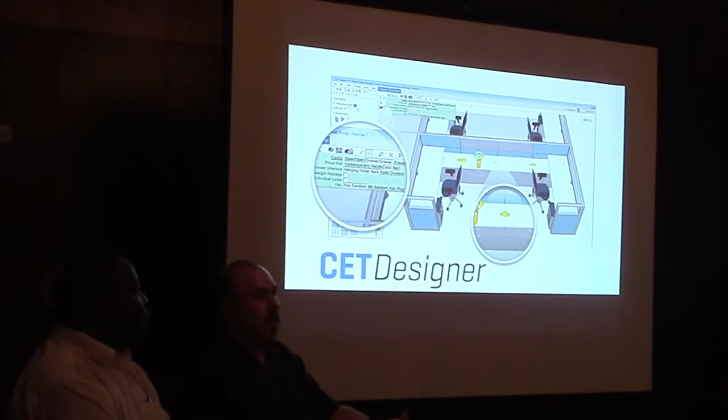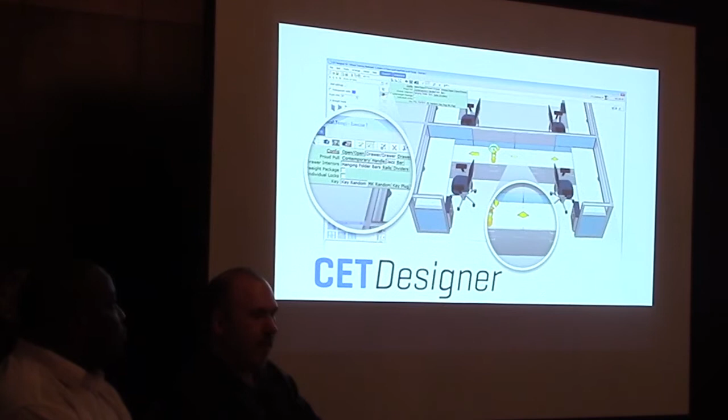We don't actually deal with Revit. What we use is a piece of technology from a company called CET Designer, made by a company called Configura. I call it pseudo-BIM, quasi-BIM. It operates on a principle called parametric graphic calculation and configuration. So essentially the software recognizes the interrelation, the correlation between specific parts and pieces you're putting together.

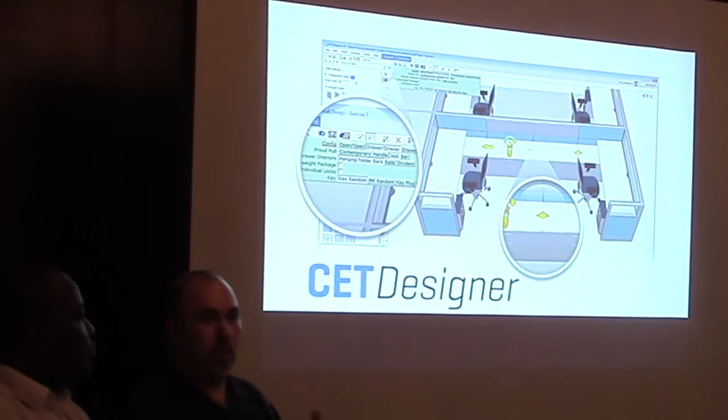And it completes that junction for you. So if you put, say for instance, electrical into a panel, it's going to immediately know to put the proper connectors in. It's going to be 3+1 power, or 3+2, or 2+2, or whatever, and it's going to fill in those parameters for you.

So what this has enabled us to do is design entire floor plans in record time. The turnover market is incredibly fast. We do real-time 2D design, real-time 3D design. It's building those 3D models as you're building the 2D plan.

From a facilities point of view, the really interesting thing is, as it's doing this, it's also building the full specifications. So when we're designing a floor plan for, say, a large municipal client, we're actually building all the specs and doing all that specification within the program itself.

Back in what I call the dark ages, which was about 5 years ago, when we were just using CAD. CAD, of course, from a furniture manufacturer's perspective, is a very static object, a very static environment. You're dealing specifically in rectangular or round shapes. There's not a lot of inherent intelligence within those objects from the furniture manufacturers.

This was the game changer within our industry now. Most of the major manufacturers in North America have moved to this modeling. So Steelcase is on it, Teknion's on it, Haworth is on it. Other manufacturers are on something comparable through ICE, which is an offshoot of the DIRTT Corporation.

So for our perspective, as we're building these models and these floor plans, we're building the specification. What it allows us to do is when we get into a situation where, let's face it, we're kind of like the last kid on the playground when it comes to a building. Everything's done before we walk in, and then everybody goes, oh right, we need furniture, okay let's get that in.

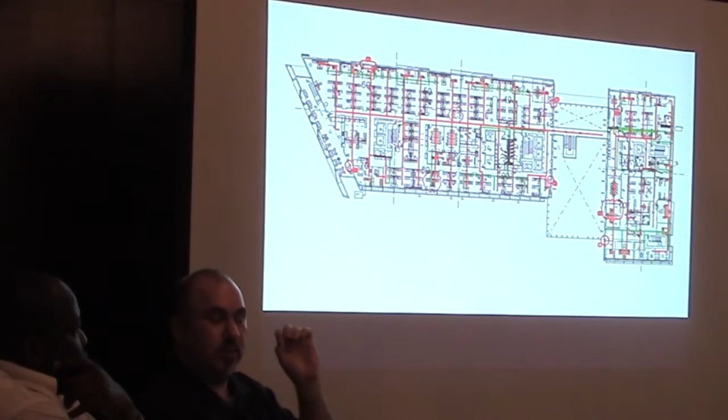So there's really kind of a multi-tiered aspect. This is why I kind of call it BIM light or quasi-BIM, because it does have inherent intelligence in the objects that allows us to extrapolate and do a lot more now than we could 5 years ago when we were just dealing with static CAD objects.

The problem is, actually, can you go back one? Yes. We have the technology. So, oh, perfect, all right.

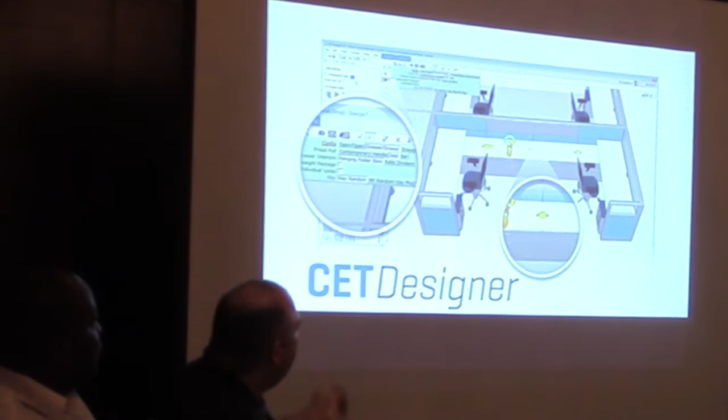So this is kind of a standard 3D with the parametrics in the corner that allow us to specify as we're doing design on the fly in front of the client. The next slide shows you the overall floor plan in a 2D, 3D modeling environment. But the third one, this is where things really get interesting.

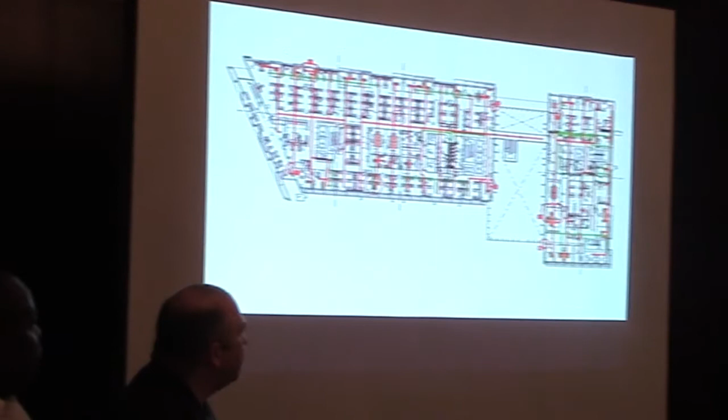This was a recent municipal project that I was involved with, and this is not typically how our floor plan turns out. Our floor plan is usually nice and very clean. It's got all the tag and all the furniture and everything up.

What we're finding now is furniture is no longer just call your local manufacturer, say I need some panels or work surfaces, it shows up 6 weeks later, you snap it in, and it's done. Now our systems are starting to get incorporated earlier into building systems. We're being influenced by raised floor, electrical box placements, things that if not done right up front will wind up being a massive amount of change orders later, a big schmozzle on site, leading to delays.

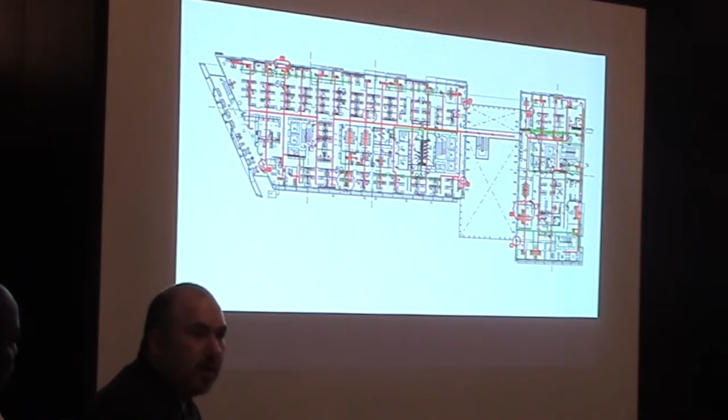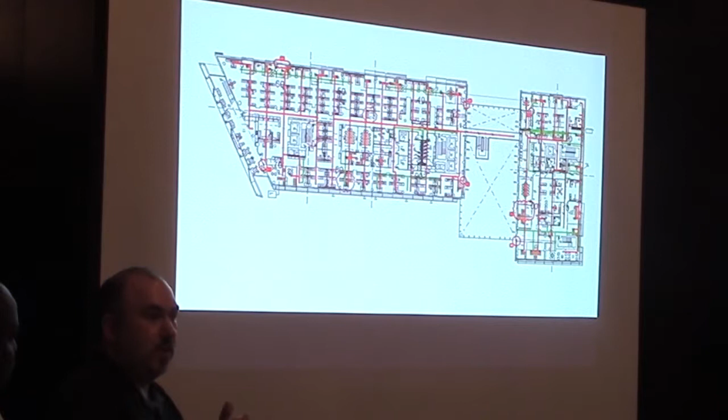It leads to occupancy permit issues and other variants. In an instance like this, all the red and green lines you see here were things we had to deal with in our demountable wall system - condensate pipes, air exchange vents, and stuff like that. It's no longer just throw a panel in, especially with Steelcase demountable walls - you're dealing with interfaces within a lot of building services.

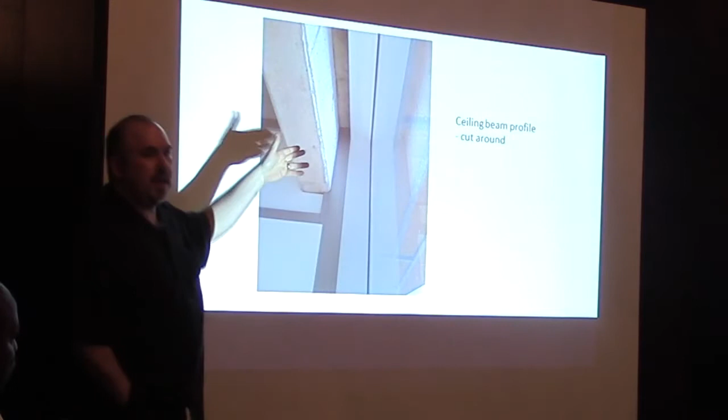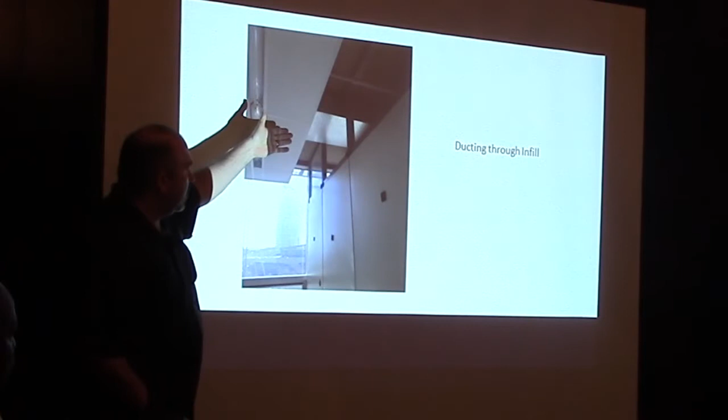This was just one instance of an issue we had on site - air exchangers ducting through our infill. When we get into issues like this that aren't realized early in the process, it's something that would have been captured on a BIM model, but not on a CAD-specific model unless you start stripping layers out and looking at specific details. A lot of the time we get on site and find that CAD is CAD and the real world is the real world. Guys get on site, and what was done on the CAD isn't really how it turns out when you're actually building the building.

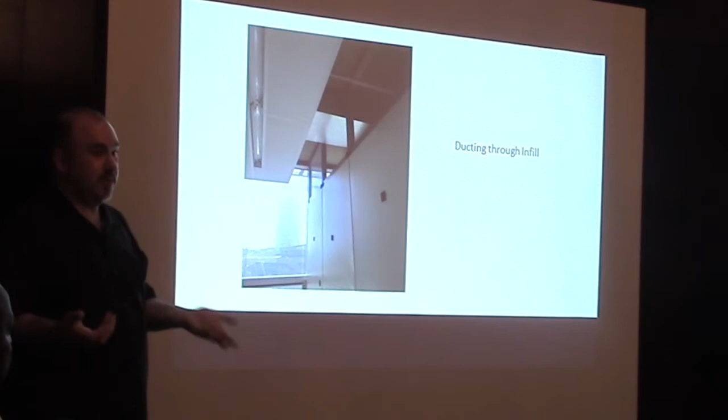So we get on site and find, oh, that's actually moved. Now we've got to deal with a change order, a delay on site, this is wrong, that's wrong, this needs to be adjusted. Labor rates go up, extra time on site, extra crews, et cetera. From our perspective, when you're looking at a ceiling and seeing all this stuff, you're thinking that could have been avoided, and that, and that.

The future for us is the incorporation of BIM into all systems within building modeling in Vancouver. It's not just about one company doing it, not just about mechanical and electrical contractors doing it - it's about that process being extrapolated across all manufacturers, all systems actually touching the building, including furniture. Because honestly, we're not just the guys who come in and throw a few work surfaces at the end anymore. Especially with things like ASHRAE 90.1, where we're looking at electrical components being controlled, workstations and sensory, occupancy sensors and things like that, we're having to get involved in the process earlier and earlier.

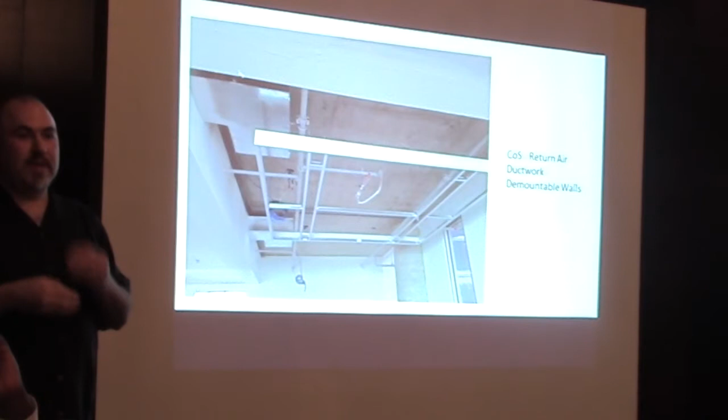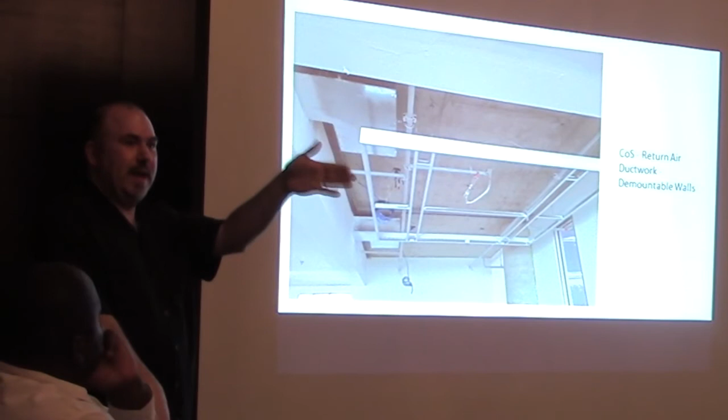That's kind of a sea change for our industry. We're used to being the last kids on the playground, not used to having to be that far out ahead in the process. So the BIM thing for us is a really unique opportunity because our mindset changed 5 years ago - we're already partially there. We're already used to looking for conflicts, validating drawings, seeing where things are going to go and where possible errors could happen on site, trying to stave off issues that would come up a year or year and a half down the road. That's kind of where we are right now, and where BIM is.